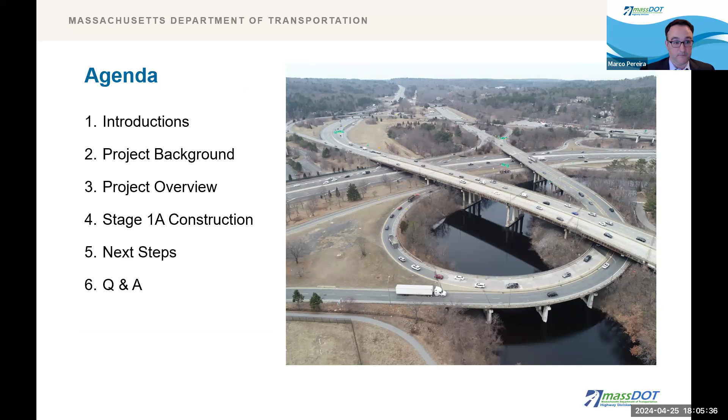The project team consists of, from the MassDOT Highway Division team: myself, the design build project manager, Marco Pereira; from District 6 Construction, Robert Fink and Catherine Barr; from Legislative Affairs, Dan Fielding. Our meeting producers are Raisa Kwame and Joseph Yu. Our preliminary design consultant is GPI, represented by Mark Elder, and our public outreach consultant is Howard Stein Hudson, represented by Aaron Reed. The winning design build team, the contractor performing the work, consists of SPS New England Walsh joint venture, led by Bill Sarapek tonight, and Jacobs Engineering, led by Darren Conboy.

How did we get here? In July 2022, we finalized a base technical concept, followed by a design public hearing in August 2022 to apprise the public of the base technical concept that we were going to put out for bid. Between then and April 2023, we engaged in a procurement process, evaluating various teams, soliciting bids, and coming up with a best value bid. In April 2023, the design builder was awarded and we issued notice to proceed. As of December 2023, work such as clearing and grubbing, utility work, the commencement of bulkhead and trestle installation, and ramp B reconfiguration took place. And here we are in April 2024 for this public information meeting to let you know what's going to come moving forward.

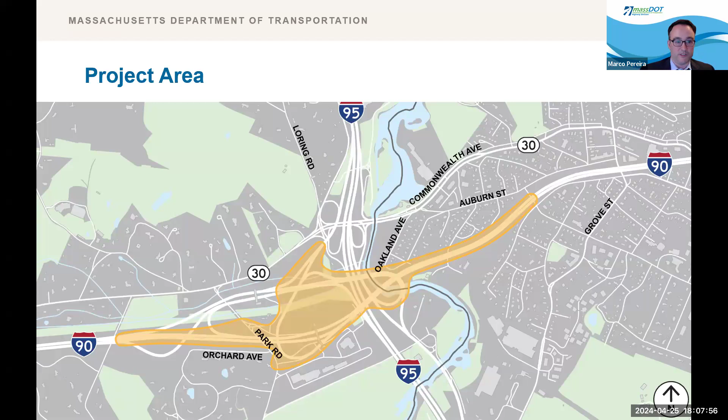Why was this project initiated?

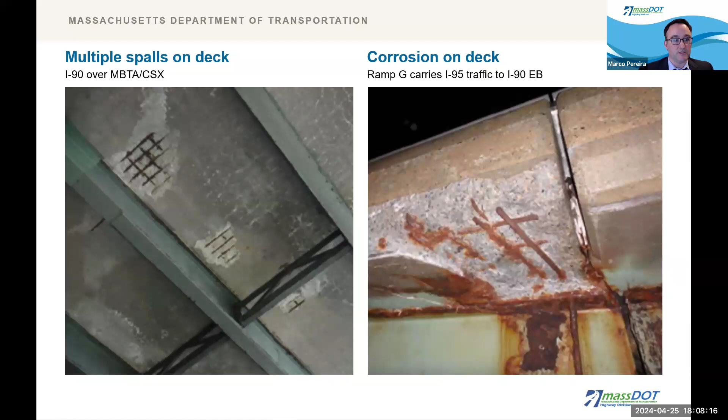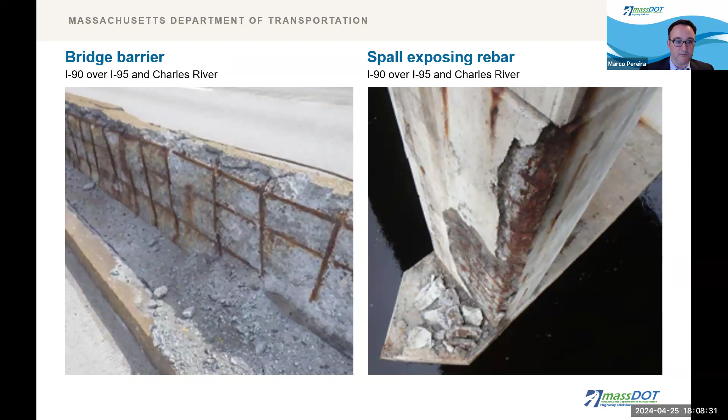The bridges are deteriorating and are in need of repair or full replacement. The image on the left shows an example of spalls on the deck at I-90 over the MBTA track, and the image on the right shows an example of deck corrosion. The image on the left here shows an existing bridge barrier that is substandard and deteriorating, and the image on the right shows another example of spalling, exposed rebar, and corrosion at the I-90 bridge over I-95 and the Charles River. In our last examples, we're showing these two images which show deterioration of steel at ramp G. It's important to note that these bridges are currently safe, but these images show that the bridges are deteriorating and need to be replaced to avoid future traffic disruptions due to maintenance.

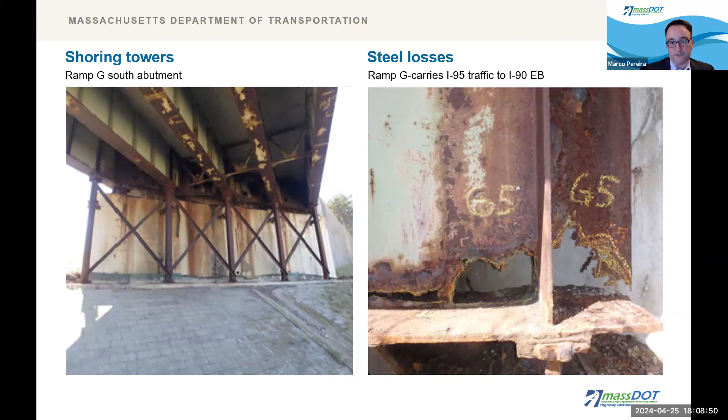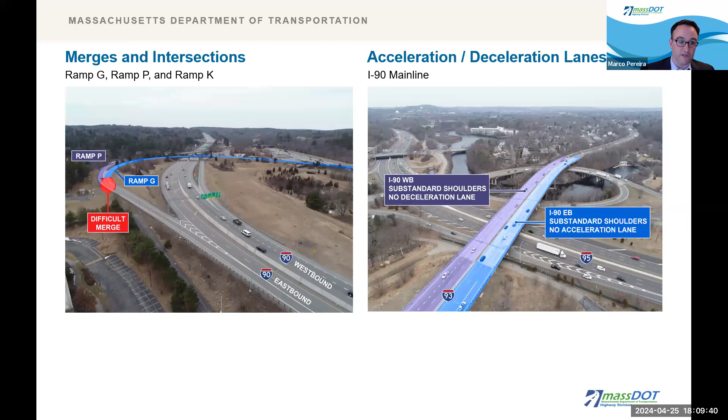What do we wish to accomplish?

Here we can see the overall project scope, and to break it down, we have the following slides.

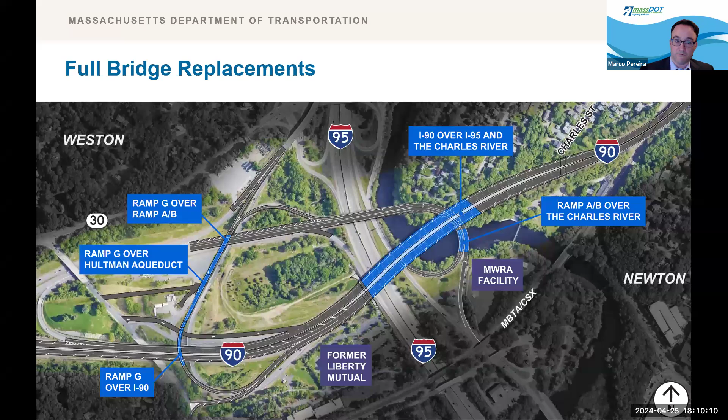The bridges shown here are to be fully replaced and are as follows, approximately from left to right: Ramp G over I-90, Ramp G over the MWRA Hultman Aqueduct, Ramp G over ramps A and B, I-90 over I-95 and the Charles River, and Ramp AB over the Charles River.

Here we show the I-90 over the MBTA bridge, which will have its superstructure replaced.

And here the following bridges will be rehabilitated: Ramp C over the MWRA Hultman Aqueduct, Ramp A and Ramp B over I-95 and the Charles River, and I-90 over Charles Street.

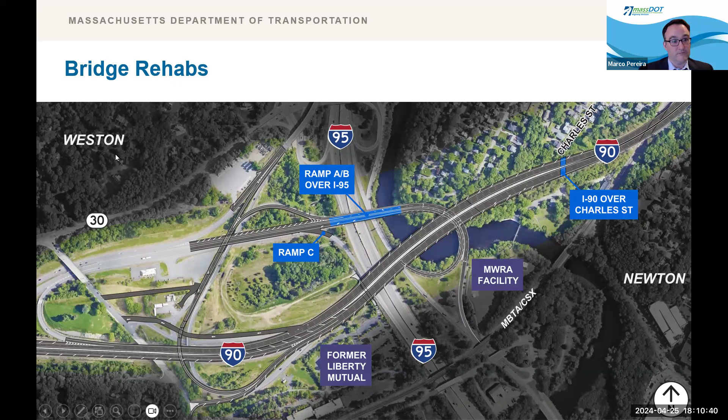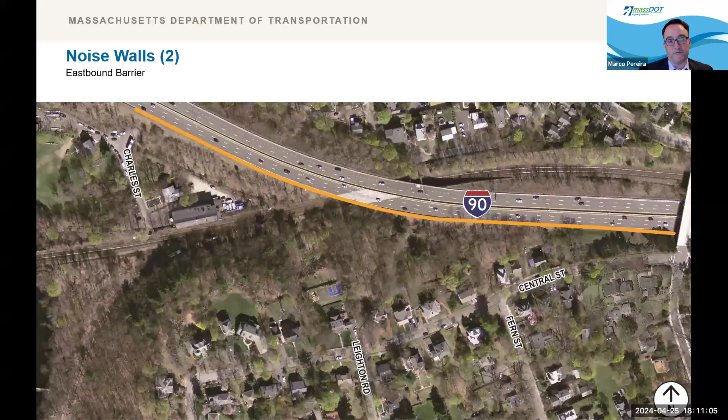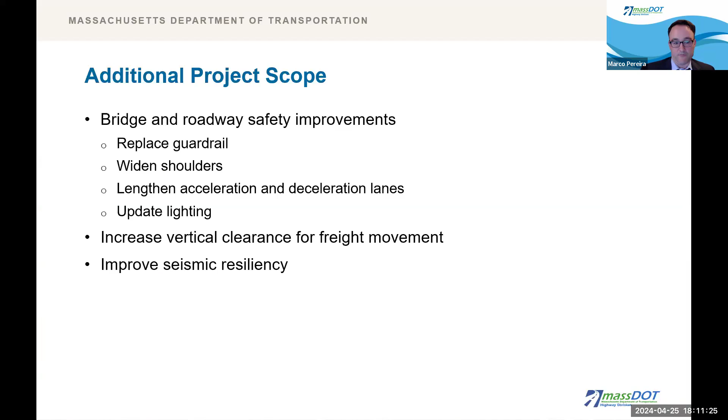Some additional project scope consists of bridge and roadway safety improvements, replacement of guardrail, widening of shoulders, lengthening acceleration and deceleration lanes, updating lighting, increasing vertical clearance for freight movement, and improving seismic resiliency.

Now I'll turn it over to the project manager for our design builder, Bill Sarapak, to walk you through work completed, the construction approach, and other elements of the project.

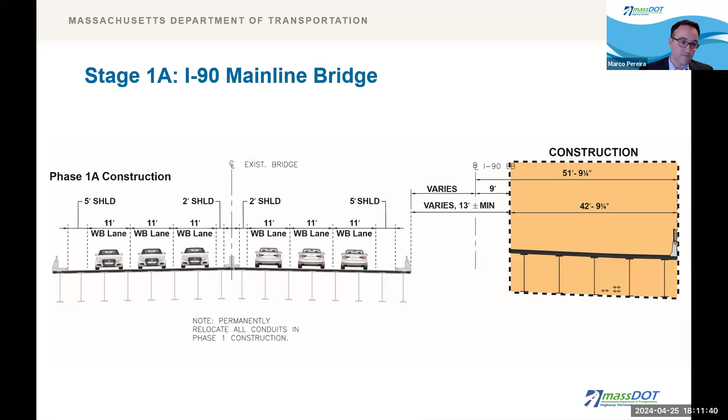Thank you, Marco. The mainline bridge carries I-90 over I-95, the Charles River, and ramps A and B. It's the largest bridge in the project at 4 spans totaling 1,020 feet long, and replaces the existing 8-span structure. The proposed bridge design accommodates maintaining 3 lanes of traffic in each direction on I-90 during all phases of construction.

During the first phase of construction, a portion of the new I-90 eastbound structure gets built offline to the south of the existing bridge, highlighted in orange in the current slide. Access for construction of the proposed substructure and superstructure is created by installing a temporary trestle adjacent to and under the new bridge to support all phases of construction.

In addition to the bridge itself, each side will have mechanically stabilized earth walls installed to facilitate the shifted alignment of the roadway and to support the east and west abutments. All existing travel lanes will be maintained during peak travel times, as stated earlier, and nightly lane closures will be required to support construction operations.

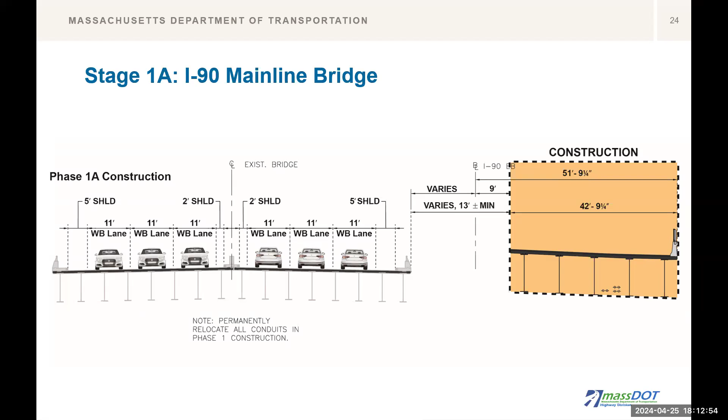Further east on the project is the bridge carrying I-90 over the MBTA commuter railroad. The proposed design rehabilitates and extends the existing substructure elements within this construction season, and then using accelerated bridge construction techniques, the bridge superstructure will be replaced during 2 weekend diversions. Each weekend diversion will close down the commuter rail to trains, replacing train service with buses, and I-90 in both directions will be reduced down to 1 lane from Friday night to Monday morning to facilitate the work.

These 2 diversions are scheduled to take place in early summer 2025. More detailed information for these 2 diversions will follow via a dedicated public information meeting early next year. Otherwise, 3 lanes of traffic in each direction will be maintained on the bridge during regular peak travel times, and overnight lane closures will be required to support construction operations.

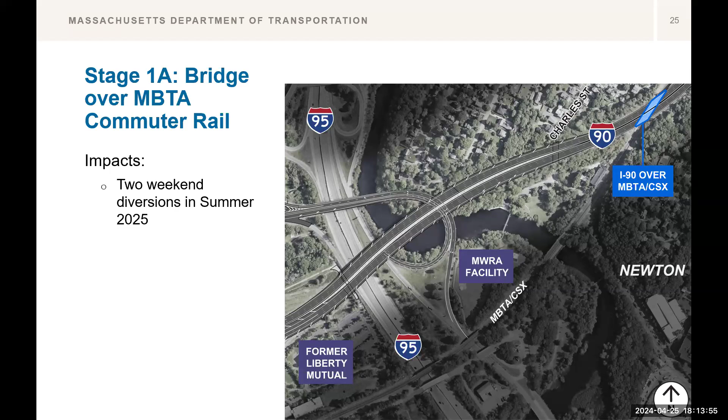Bridge 64 carrying ramp A and B over I-95 and the Charles River will be rehabilitated, including substructure repairs, structural steel repairs, blasting and painting the structural steel, and safety barrier improvements. Bridge 65 carrying ramp A and B traffic over the Charles River will get a completely new substructure and superstructure. Work on both bridges will be phased in order to maintain traffic on the existing bridges and the new structures that get built out in future phases.

However, it will be necessary to reduce the travel lanes from 2 lanes down to 1 lane in each direction for the duration of the construction work on these bridges. These traffic impacts are expected to remain in place through the fall of 2028. Travelers are encouraged to use Mass 511 and navigation apps for current traffic conditions through this area.

Ramp G carries traffic from various feeder roadways to I-90 eastbound. The proposed design for Ramp G builds 3 new bridges: 1 over Ramp A and B, 1 over the Hultman Aqueduct, and 1 over I-90, all offline to the west of the existing bridges. Construction phasing will require coordination of traffic management plans on I-90 and Ramp A and B to build the new bridge elements, but they won't impart any additional lane reductions at these locations. Once again, off-peak lane closures will be required to support construction operations.

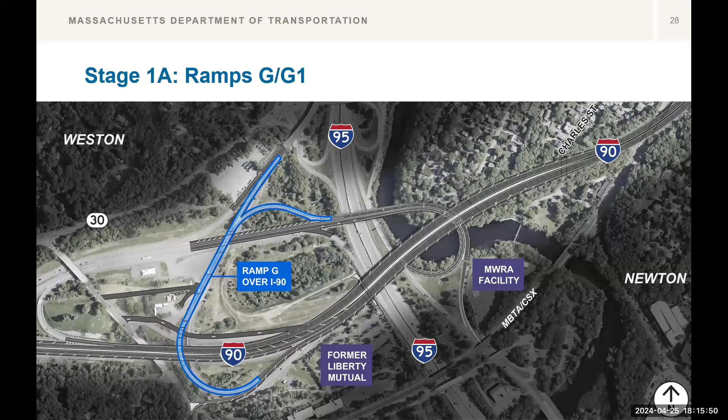Overall, there are 5 stages of construction on the mainline I-90 to facilitate the bridge and roadway construction, and work will continue now through the fall of 2028. To date, the team has progressed the highway and bridge design submissions, implemented the temporary ramp configuration to establish a work zone, and crews have progressed the trestle and bulkhead installation to support mainline bridge construction.

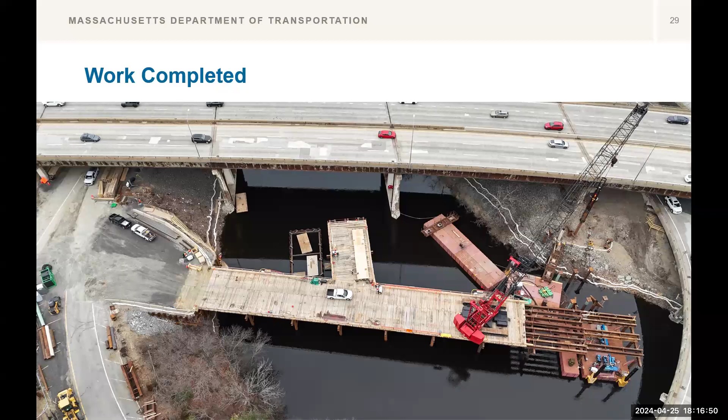This is a photo from a few weeks ago, which shows the trestle that we're constructing through the middle of the slide with the crane placed on it. The existing I-90 eastbound bridge is at the top of the slide, and a portion of the new I-90 eastbound will be built between the trestle and the existing bridge. The team has also performed some early action utility relocation work to facilitate new bridge construction. I'll now turn it back to Marco to talk about the ongoing coordination on the project.

Thanks, Bill. Some of the other coordination that'll be happening on the project is with the MBTA to ensure effective commuter rail operation and passenger access to Riverside, coordination with other MassDOT projects, emergency services on I-90, and to maintain boater access to the Charles River while communicating certain public safety restrictions during that construction.

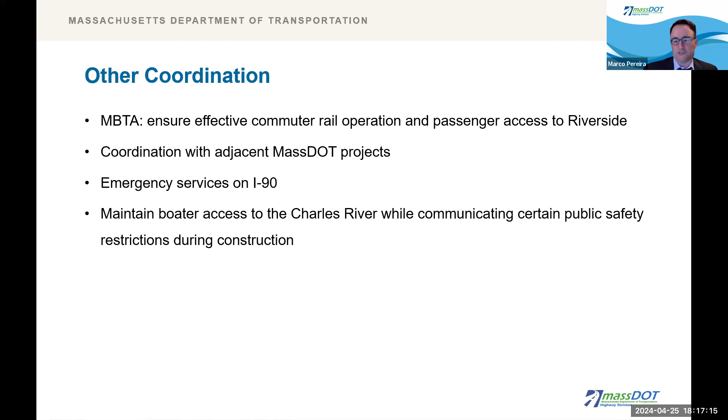How will we keep you informed? Through our dedicated project website as shown on the slide, which is also available through the QR code shown, through two-way communication via the project email address also shown, through navigation companies such as Google and Waze, who MassDOT notifies, and through future public meetings, the next of which is expected to take place in spring or early summer of 2025.

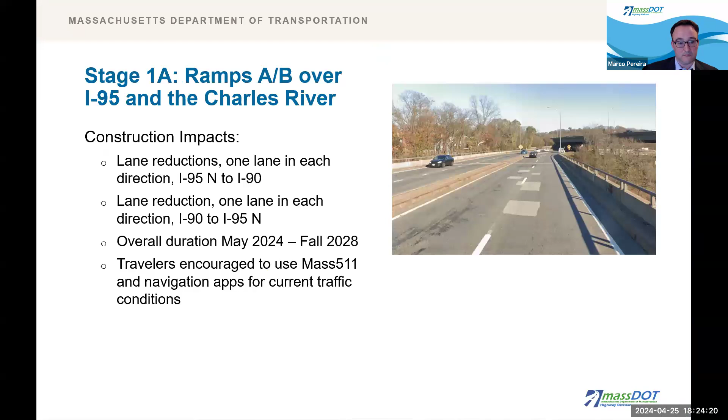Thanks for that question. Yes, it will. I'm assuming you're talking about the segment. We're not doing anything on I-95 in terms of affecting its capacity or lanes. The only place where the project touches I-95 directly is—can someone go back to one of the maps just for context? Any of them will do. That one's fine. Where the blue arrow loops around that collector-distributor road, we're not changing the configuration with respect to I-95. So short answer, no, we're not messing with I-95, it's staying the way it is.

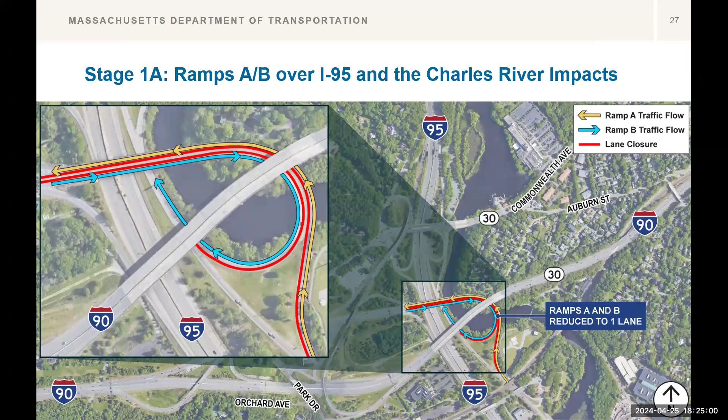Will the bridge expand? Wait—hi. Oops, I can put my hand down now. All right, thank you for your explanation.

Thank you. We have another question from David Kozis: When will the noise walls that were described be installed in Newton? Thanks, David. Regrettably, later in the project. Bill, do we have more specifics on where that falls on the schedule? That's, like you mentioned, towards the end of the project, in 2027 and 2028.

Thank you. We have a raised hand from Kathy Cade. I think I just, hang on a second here. I think I asked my question and was trying to lower my hand, so thank you. I was just curious about the environmental stuff and look forward to hearing more, but I'm not surprised that the state and the Corps of Engineers overrule the local jurisdictions.